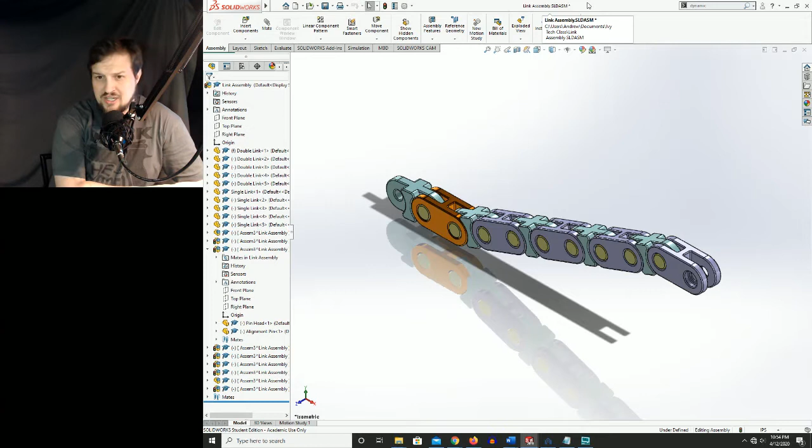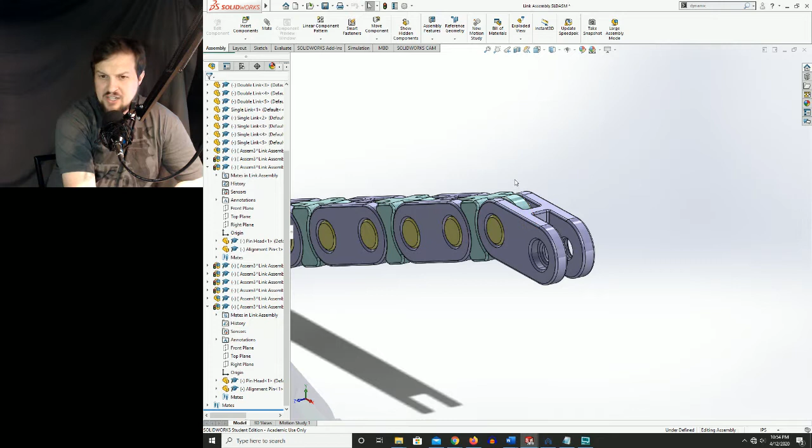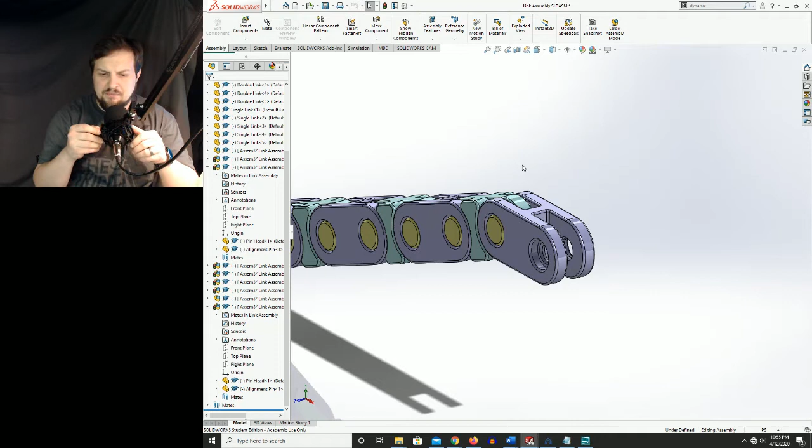And what I mean by that is, here in the Link Assembly, we have two different pieces for the pins, one piece there, one piece there. One's an alignment pin, one's a pin head. As far as the actual assembly goes, it's very difficult to actually explain that to people. But with an exploded view, we can move those components out from their original location, show the path that they're going to be located on, and better portray that information to the end user so that they can more easily understand what the finished product is going to be.

So to do this, we are going to start off in our assembly file here. We're going to create our exploded view first, and then we're going to insert that into a drawing and pull up a couple of the different things that we create inside a drawing using all of this. So assembly drawings can be done in a lot of different ways. They can contain a lot of different information. You will always have item numbers.

An item number is just a number that references each one of the components in a list somewhere. That list can be on the sheet itself in the form of a bill of material table. It can also be a completely separate sheet that is maintained outside of the Solidworks model, giving you a little bit of flexibility as far as ECNs for part numbers and drawing revisions.

But what we're going to be doing with this class is placing the balloon numbers on our form, and then placing a bill of materials on the sheet as well. So to do that, we need to be able to clearly and plainly point out each one of the finalized components.

Usually at this point I would show you guys a drawing from work that I brought in, but it's kind of hard to do that because I haven't been into my normal day job in about 3 weeks, and I've got to get permission to show you guys that stuff anyway.

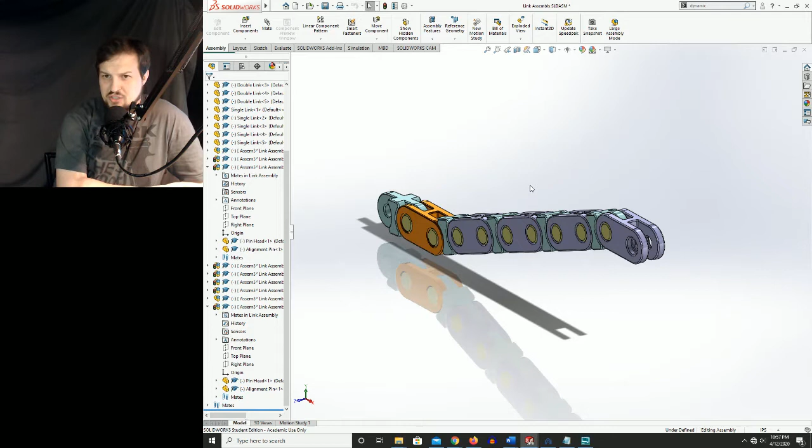So instead, we'll just go ahead and hop into it. Make sure that you've got your Link Assembly open, and we'll get moving. Now, if you remember, in our Link Assembly, we created a couple of mates to derive where this thing was going. We're just going to attach this and pull it all the way up there on top. So I'm just going to give this a little bit more of an arc here.

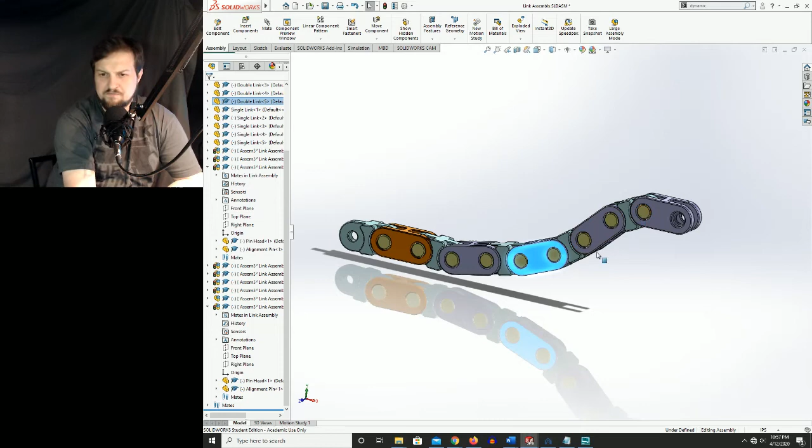It's just to show that it doesn't need to be as rigid. Because we're dealing with a loose assembly here, it doesn't matter that much. The majority of your assemblies will be 100% tied down, and you won't need to modify that at all. It will be what it is. But for us, we're going to go ahead and do that.

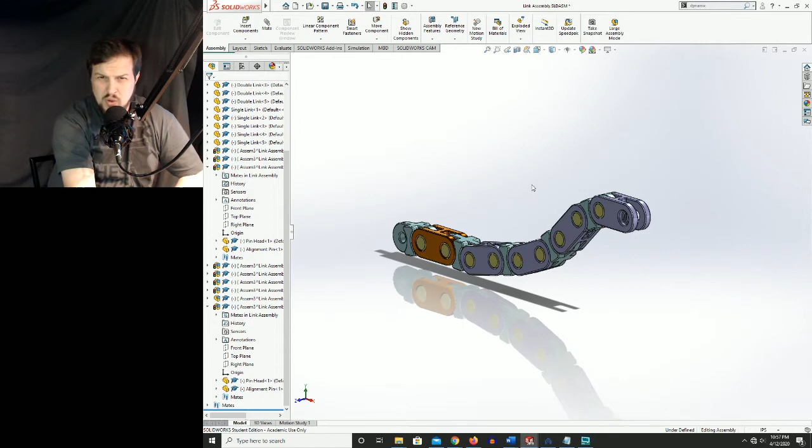So next thing we need to do is determine a good view that we think we're going to use for this. Typically speaking, if you hit your spacebar, it's going to bring up your view cube, and you can just hit this corner right here. That'll give you an isometric view. Usually isometric views are going to be optimal, but you have a couple of different isometric views to choose from. I'm going to pull this window down here, and if you click the drop down next to our isometric view, you can get all of our isometric options.

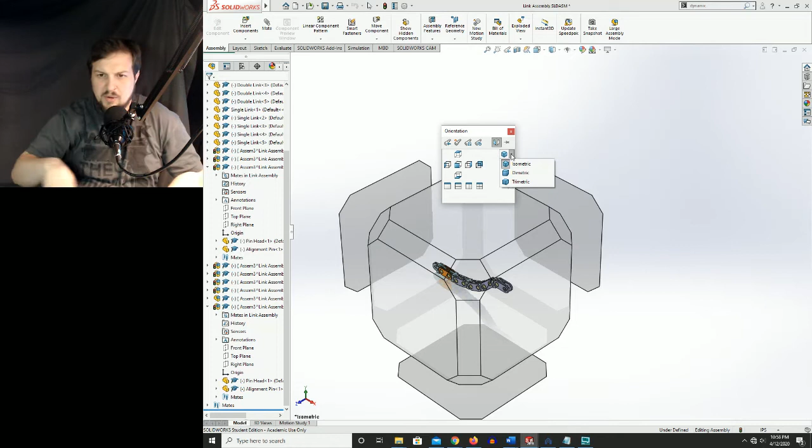We've got isometric, dimetric, or trimetric. And those are just different angles that you're looking at the thing. So an isometric is basically a 45-degree angle off to the side and then 45 degrees kind of towards you. It's kind of splitting the difference of all of those. If you see on your view cube here, it's that corner of the view cube, so you're looking down from what would be the corner. Dimetric is taking it from more of a frontal angle, and then trimetric is kind of a combination in between those two. I'll give you an example.

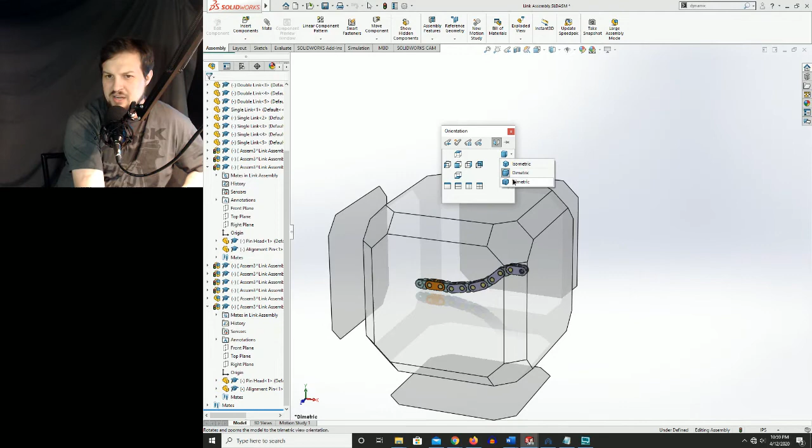So this is isometric here that we're looking at. You can see we've got a lot of the top on this view. So from there we can go ahead and go dimetric. You can see we don't have quite as much of the top now. We have more of a front view. And then if we hit that drop down one more time and go to trimetric, now we have kind of a combination of the two. It's a more front view, but we do have more of the top than we did on our normal dimetric view.

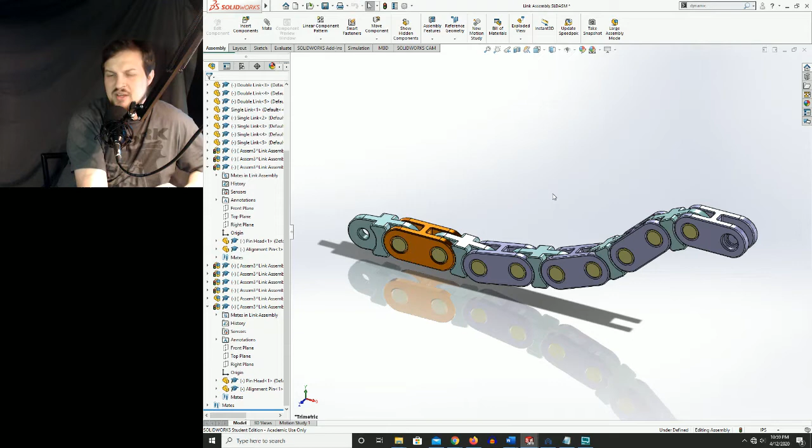So for this particular one, I actually like trimetric a little bit more. It gives us the ability to see the top, to see the stuff that's going to be on the other side, while at the same time not going full on from the top. It gives us a little bit more of a view of what this thing's actually doing. But it doesn't really matter. You guys can go whichever one you want. The isometric will give you the ability to see the stuff on the far side a little bit easier, but kind of loses a little bit of that depth as far as our finalized shape goes here.

So once you select one of those, we need to go ahead and start our exploded view. The reason that we selected that before we start our exploded view is because the exploded view, where we move all of our components, is going to vary greatly depending on what your view is on your sheet. Well, I guess I should rewind slightly. An exploded view is where we're actually going to take each one of the components that is building this. So we've got the two pins, the alignment pin and the pin head, and we've got the single link, the double link. We're going to move them out to show this in an exploded orientation, kind of move everything apart from each other.

Now, we are going to then add, they're called, why can't I remember what they're called? I don't know, it's been a day.

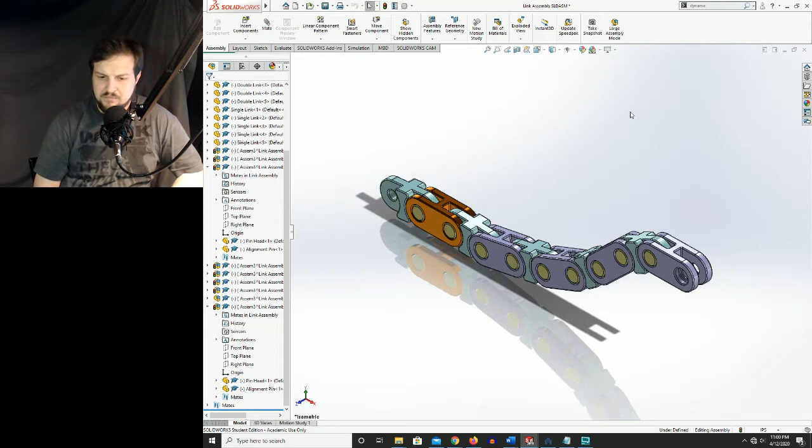There's exploded lines then to show the actual path that these would have to take to get into their final location. So another good option is when you've got the chance to, don't explode all of the things. Like we've got here, you can see we've got one pin set, two pin set, a double link here, single link here, double link here. Then we've got all these all the way down. In this case, I'm not going to explode all these. These are all identical in orientation to what these are.

So what we're going to do is explode this double link, this pin set, and this single link. Because we want to do this in a way that's conducive to actual physical real life. We're not going to move this in a way that isn't able to actually be done. So I'm not going to do this double link here, because if I did, I would then have to remove this pin set, and that's just too far. That's more than we need. We only want to do the amount of explosion that is necessary to get our point across, convey our story of what this part is.

So let's go up here on the top, up here in our ribbon. We're going to be on the Assembly tab in our ribbon. We're going to go about 2/3 of the way across and 3/4 of the way across, and we're going to hit Exploded View. Now this is going to open up a new tool. We can see our tool on the left-hand side here. We've got an exploded step up here on the top.

The way the Exploded View works is it's going to actually follow a step-by-step process of what you click on and how far you move it. Now, once you click on something and you move it and you let go, you're done with that step. You can go back and edit that step, but anything else you click on from that point, unless you're editing, is creating a new step. And I'll show you what I mean here in just a second.

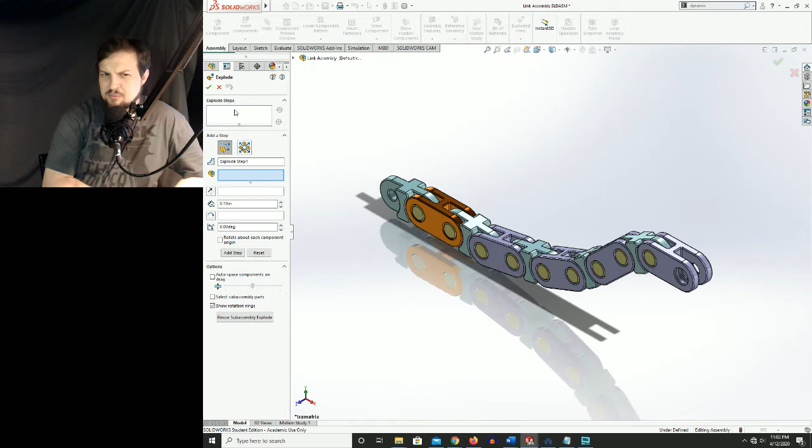But in order to keep your exploded view clean, able to be worked on by other people, and simple enough that you can go back and make changes later on, because you will need to go back and make changes, we want to keep it to as few steps as possible. So if you're moving a component out 2 inches, you want that move to be done in one move. You don't want to move it out 1.1 inches and then move it again 0.9 inches. You want it set right at 2 inches.

So over here, this is the name of the exploded step. We're not going to be playing with any of the names, but you can rename them. Right above that is the type of explode. We've got regular step explosion, which is just going to be a linear translation based on the X, Y, Z coordinates. Next, we've got a radial step.

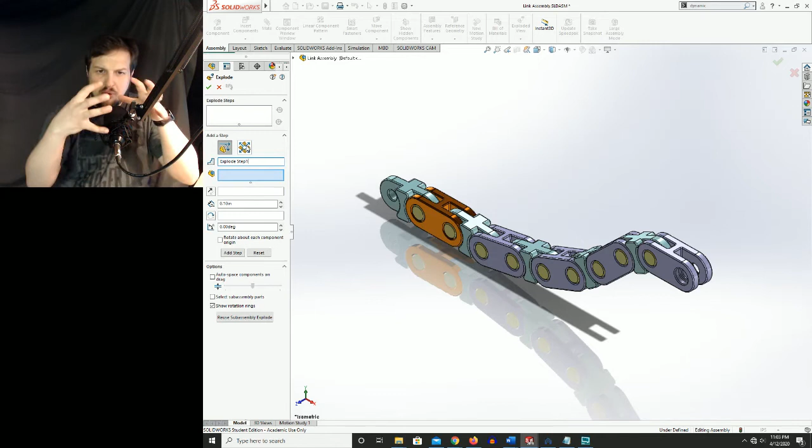So in this one, you're going to select an array of components around a center point, click this, and then it will expand them all from that center point. This is useful when doing things like bolt circles. However, you can't do this instead of pulling the bolts out and then expanding them. This has to be done in conjunction with a linear translation.

A translation, by the way, when it comes to movement, is just a straight line uniform movement, typically along one of the axes. It doesn't have to be along one of the axes. It can be at an angle to an axis, but typically speaking, it's in line with it.

All right, down from there, we've got our selection pane. This is going to be the parts that we've selected. And then from there, this is the explode direction. So let's go ahead and start moving some parts. So I'm going to click on this one right here, and I'm going to pull it out. Let's hope that didn't create two. It did not. However, it did select our sub-assembly here.

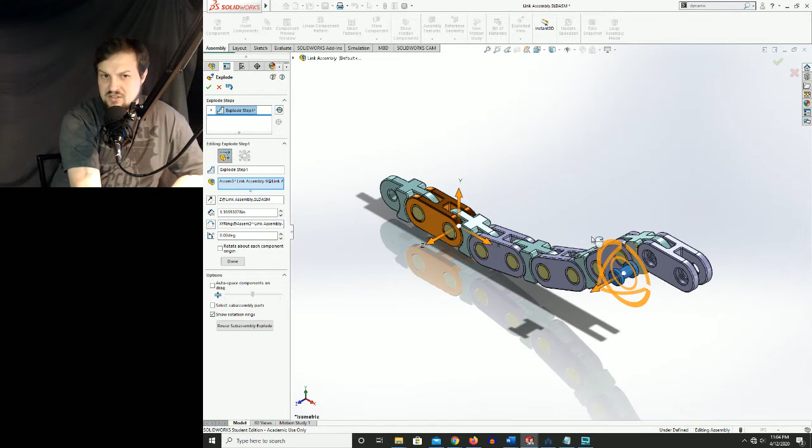Now, we actually don't want it to select our sub-assembly, so we're going to have to do this a little bit different. We're going to get rid of that. Let's get rid of this step really quick. Delete that step. Okay, so the reason that it pulled that out as a sub-assembly, and it may not on yours because you guys are getting a different assembly to be able to explode this from.

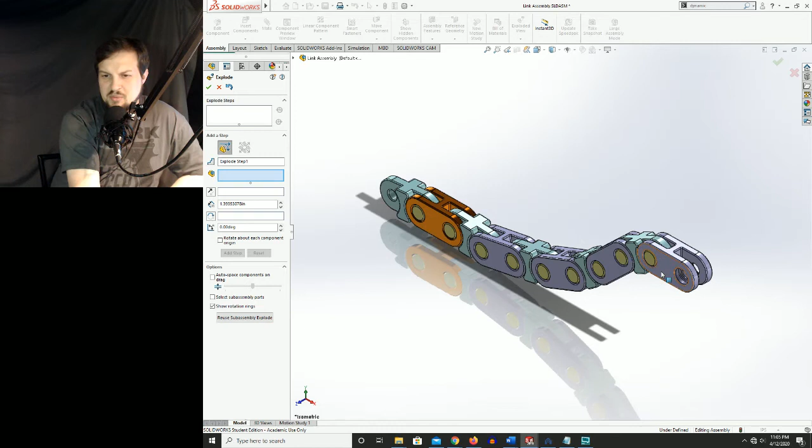If you have a sub-assembly like that and it tries to drag out the entire sub-assembly, what you'll need to do is come up here to expand this sub-assembly. Then we want to highlight the sub-assembly that we want to move, this one right here. We're going to expand that. And then we've got two different ones: pin head and alignment pin. Let's click on alignment pin. And now we should have just one of them. You can see that it's just that alignment pin.

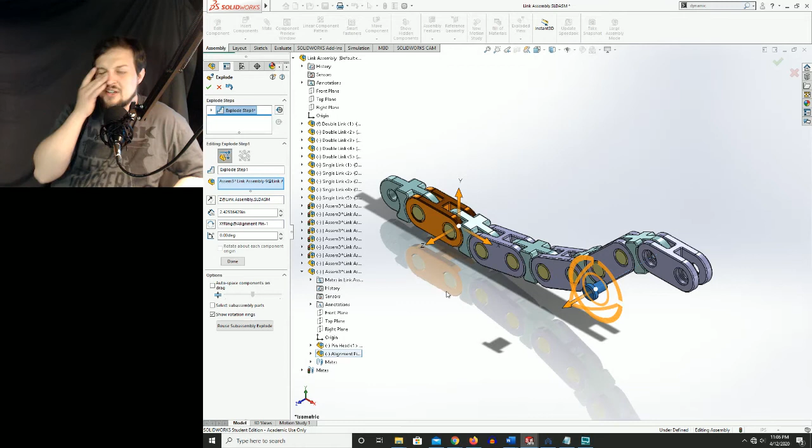Okay? So that's kind of the long way to go about it. If you click on it and it doesn't try to pull out the entire thing, there you go. You're good to go. You'll get this point. If it does try to pull out the entire thing, like if you're using your own Links assembly, or if it just does it, you'll have to go into the model tree like we just showed you, go down, and highlight the actual one.

Now, the reason that I knew that was that one is because as you hover over these pieces inside your model tree, you can see on my actual screen, there's an orange box that pops up around the subassembly that I'm hovering over. So now I need to do the pin head, which is the other one. So I pulled that one out and I dropped it. I let go and now it's moved.

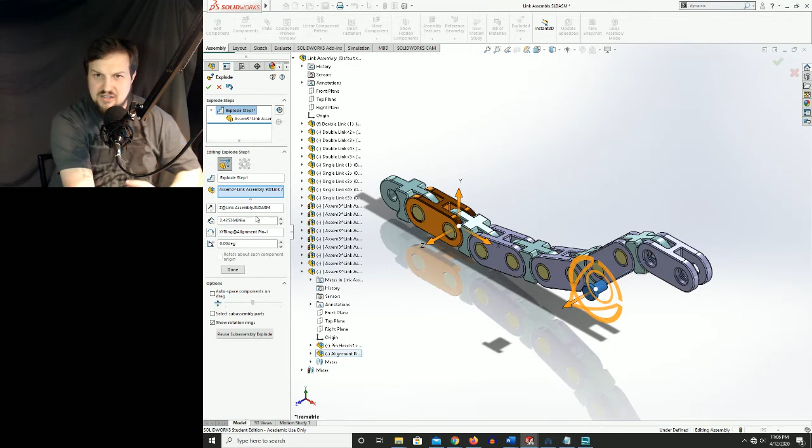So now if I click on another item, oh, no, they changed it for this year. Sorry, this is the first time that I've done assemblies within 2019. We're still in 2017 at work, which is, don't get me started on that.

But, okay. So we've got our pin pulled out. Cool. We've got it in the Z direction. That's fine. We've got our distance here. Let's change that distance. Now, we can move it around a little bit and try to hit about 2 inches. Or we can just come over here, click at this distance section, 2, enter. Now it's at 2 inches.

We can hit this button here, which is going to flip the direction of the offset. You can see when I click it, it's going to go over to the other side. We don't want it on the other side. We want it on this side. So we're going to leave it over here. And now we're going to hit done. Hitting done accepts that change. It places that explode step up into our explode steps up here. Oh, done. There we go. And now we are ready to continue on to the next step.

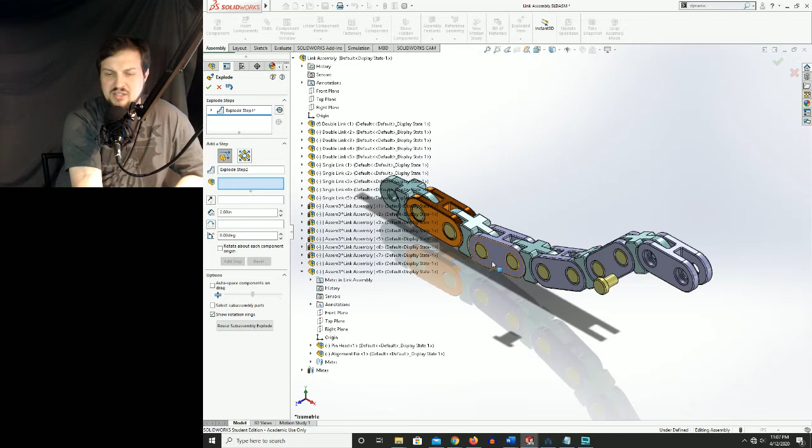So the next step that we want to do is we want to actually move this guy here. But remember, if I click on that, it's going to click on the entire assembly. I don't want to do that. So I'm going to come back over here into my tree. I'm going to go all the way down. I've already expanded this so I can click on just the pin head. And now I'm going to go out the other side. Now I can go approximately the same distance at that 2 inches, or I can go not quite as far.

It doesn't really matter. What I'm trying to do is I'm trying to orient these in a way that I can see them from the view that I'm looking at right here, because once we put this on our sheet, on our paper, we're going to need to be able to see all of this stuff, obviously, without rotating around our model. Because if you have to rotate around your model, you're not going to be able to see it in the sheet because you can't move the stuff in a sheet.

Okay, so I've got this one moved out. It's moved out at 1.429, so let's just go 1.5. I like modifying these to rounded off numbers because round numbers are pretty. They're just easier to organize, easier to keep track of, easier to maintain, and it's easier to uniform. So if you need to move other things out at approximately that distance, I know that this pin head is moved out at 2 inches, this one is 1.5 inches. So now I'm going to go ahead and hit done, and I've got those 2 pins moved out.

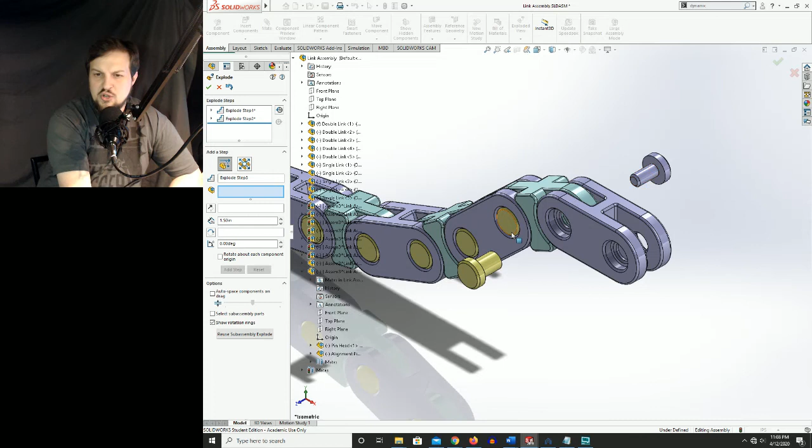The next thing that I want to do is I want to move this link. Now I'm going to move this link in this direction right here, the X direction, basically pulling it out and away from the model. Now, the thing about that is, if I do that and I leave my 2 pins that we just moved right where they are, it's going to look like those 2 pins don't interact with our link. So those pins are actually going to need to go with our link to remain properly oriented in the spot that they need to be.

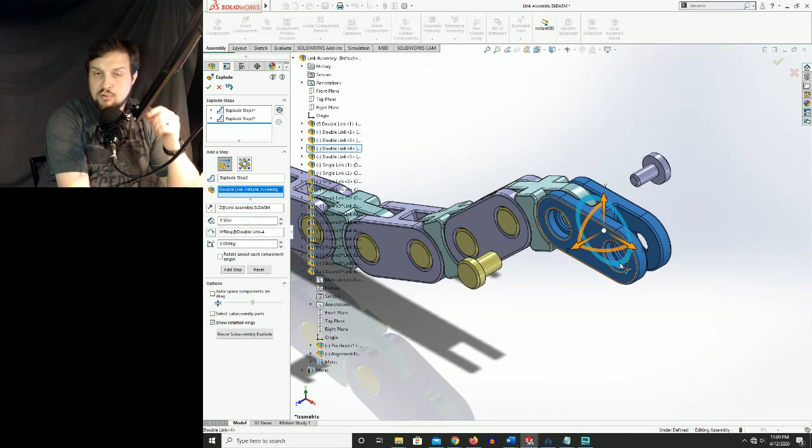So let's go ahead and click on those. So now we've got all of our components. We've got our 2 pin heads. We've got our double link. Now if I click and pull, you can see it's going to pull that out. Okay, let's go to about there. Okay, so now we've got our 2 pins out. We've got our double link out. And we are done with that step. So now over here you can see we've got 3 exploded steps. We've got explode step 1, explode step 2, and explode step 3.

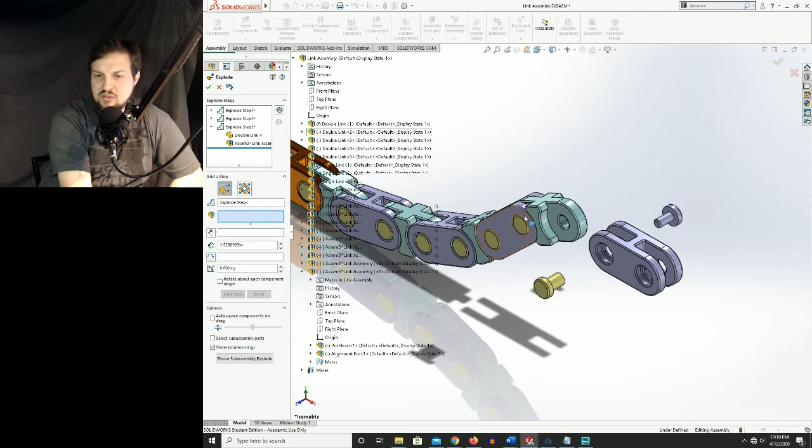We're going to go ahead and end this video, and when we come back, we're going to go ahead and move the remaining 2 links that we're going to use in our exploded view, the remaining 2 pin heads in our exploded view, and then this link right here. So, go to the next video for that.